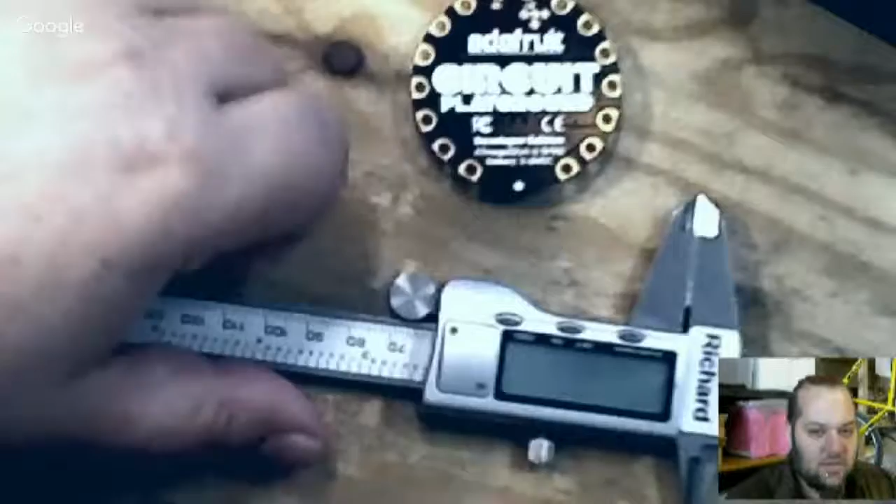So let me put that aside here. Essentially, I was going to show you guys how I can use my calipers and do all the measurements with the 3D program to get that all set up. But thankfully, Noah over at Adafruit was good enough to let me take a look at his 3D model that he's been putting together for Circuit Playground.

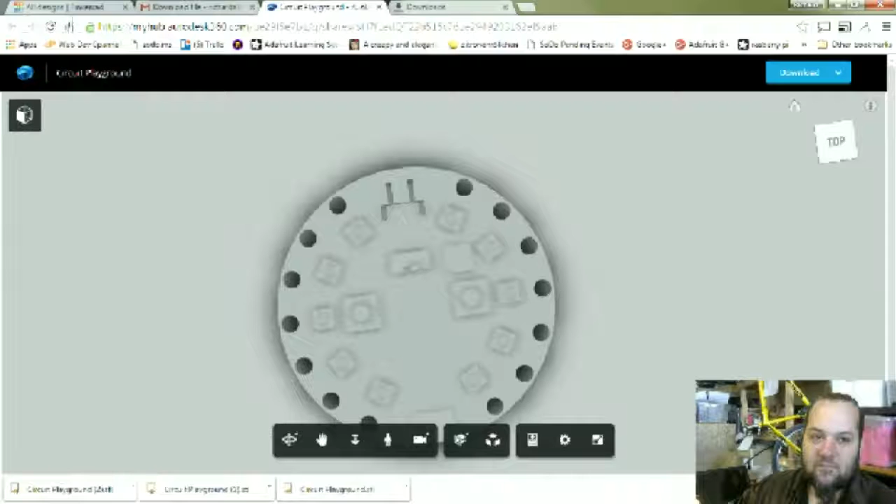So what I'm going to do is, this has got all the measurements that I need off of it. I'm just going to take this, import it into Tinkercad, and show you how I can make a basic holder for the Circuit Playground for the Pokemon Go badge. This will include a place for the battery to hold it. I have this idea about trying to make it so that the battery actually holds the Circuit Playground into the enclosure, and we'll kind of see how that goes.

So I'm just going to switch over here to Tinkercad, and I'm actually going to move my camera so we can see while I'm going through Tinkercad here.

So for those of you who are unfamiliar with Tinkercad, basically what this is, it's a free program by Autodesk. It's an online program, and I've been using this to teach kids about 3D printing. It's really great because it's very easy. You can basically just stack a bunch of shapes together. You don't have to deal with the types of facing issues that I've had with doing 3D modeling in programs like SketchUp for 3D output.

Yeah, I mean, we can put this enclosure together super quick, especially since we have a 3D model of the device itself. That would have been the most time-consuming part. So I'm going to go over here to import. I'm going to choose a file, and I'm going to upload that STL file.

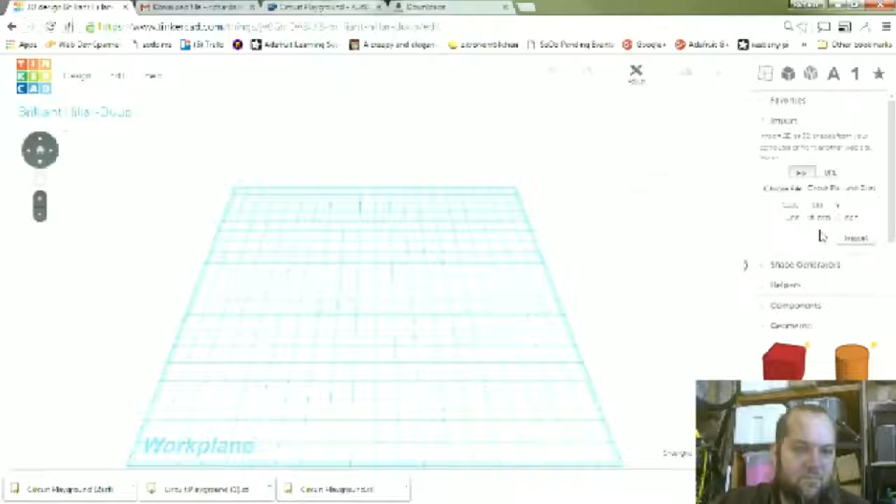Don't know if it's in inches or millimeters, but I'm going to go ahead and import it in millimeters and see how that is. That looks pretty right. So that should be 50 millimeters. Let me just confirm with the Circuit Playground. I seem to remember it was like 40 millimeters. Actually, no, 50 looks right. No, that was another device I was doing.

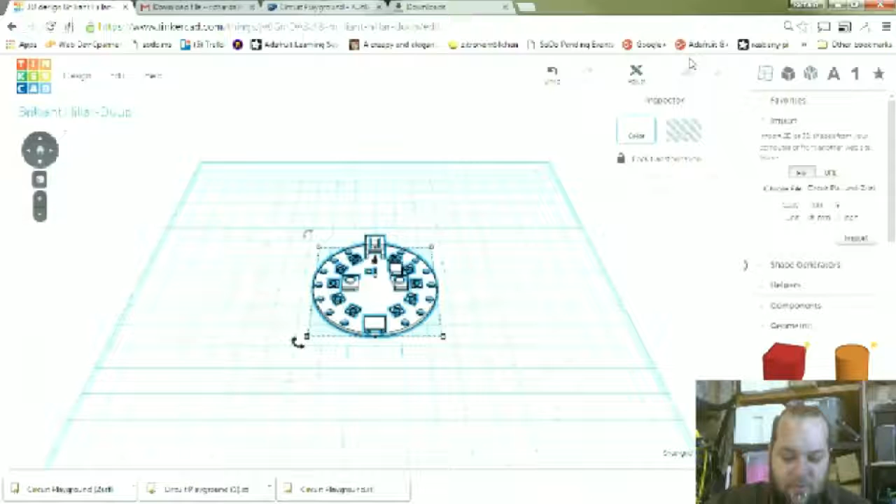I've been doing a lot of this type of thing, using my calipers to measure devices, and do a couple of components for Eagle, as well as some enclosures for this stuff. All right, so yeah, 50.82 millimeters, and this is 50.78 millimeters. So yeah, that's pretty darn close.

We do want to probably give it a little bit more room because the 3D printing does usually add a little bit to that inner diameter of something. So if we want this to fit inside of our enclosure, we're probably going to want to go out to, let's see, yeah, I might just push it out to like 51, just to be safe, for the outer diameter of that.

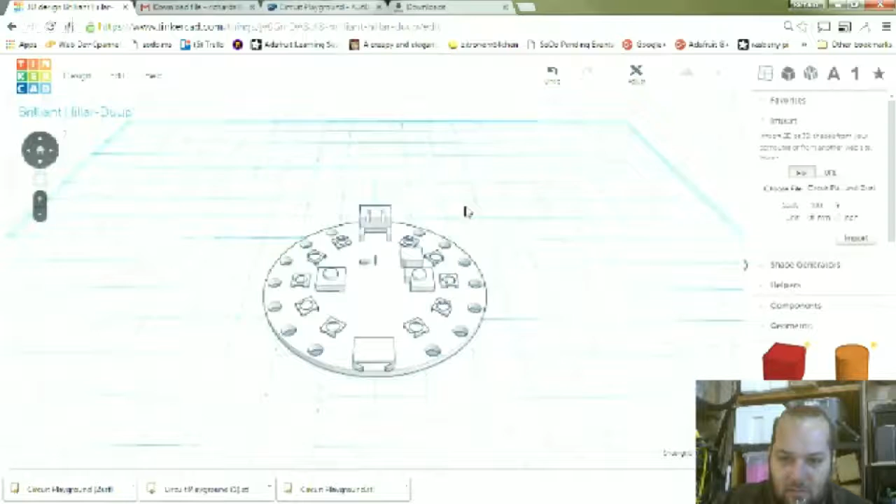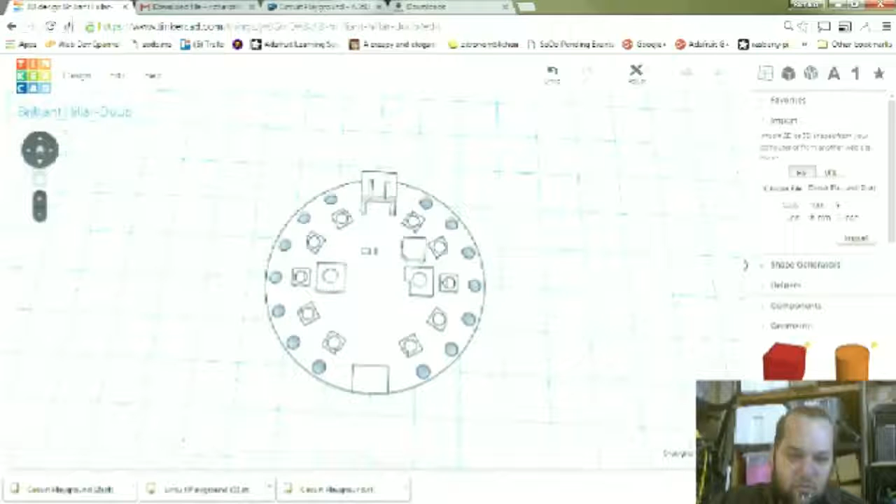But let's go ahead and, it looks like we do have a little bit of glitching in the import with some of those faces, but that's okay. This gives me the general idea of what the positioning looks like, and specifically like the height of all these components. So what I'm going to do is I'm going to start with a cylinder, and I'm actually going to make this a clear cylinder just so I can see. So I'm going to make that a hole first.

I'm going to reduce the height of this, and this is basically going to be the outer shell of our piece. I want this outer shell to just cover the top of that battery container, or the battery holder.

Shift to increase this.

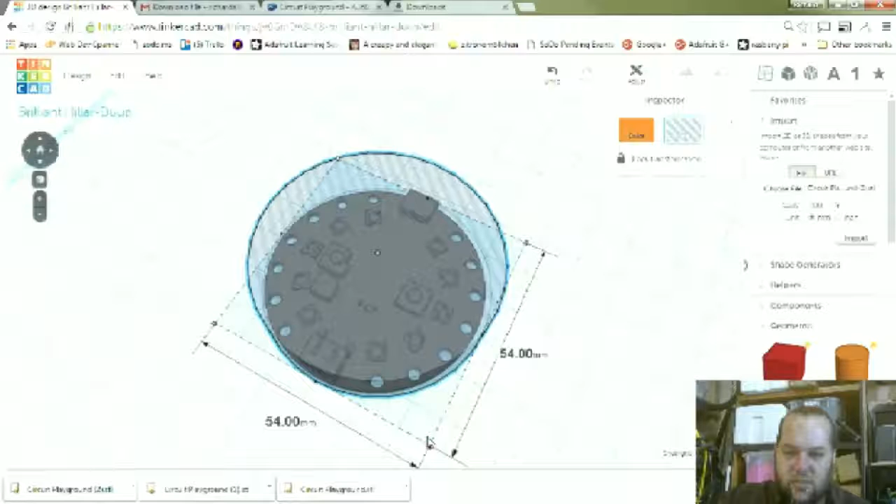The one gripe I guess about Tinkercad is that it doesn't allow you to just go in and enter numbers for creating shapes. You pretty much have to just look at the numbers that are on there. But all in all, it's pretty good.

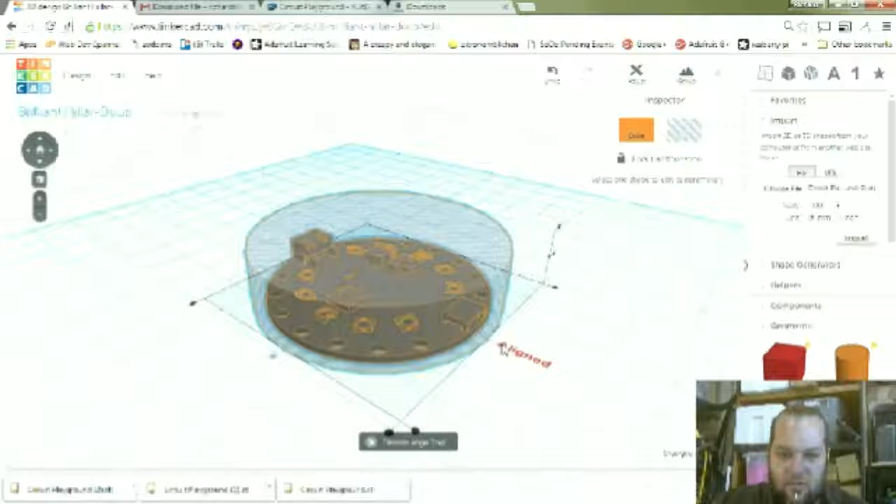So I'm going to align this stuff so that everything is centered. All right, that looks pretty good.

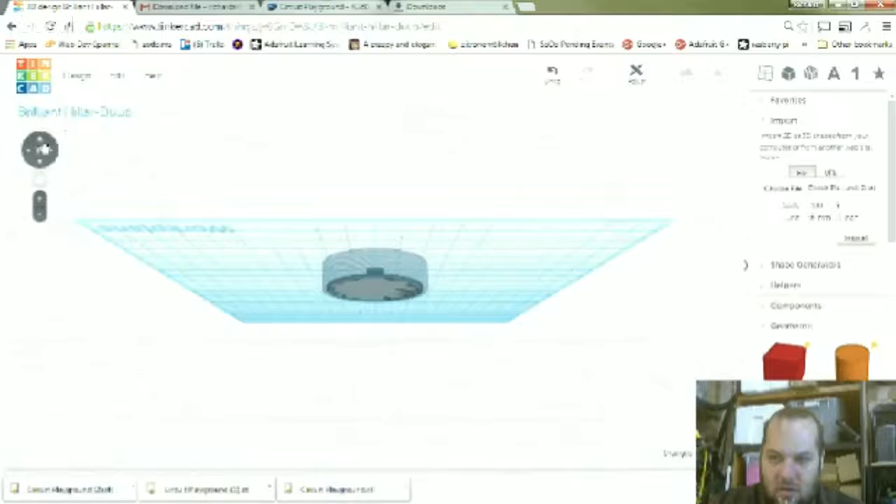And then I'm going to come here and look at the side of this, and just make sure that my enclosure is going to come just up above that. So let's see, 8 millimeter.

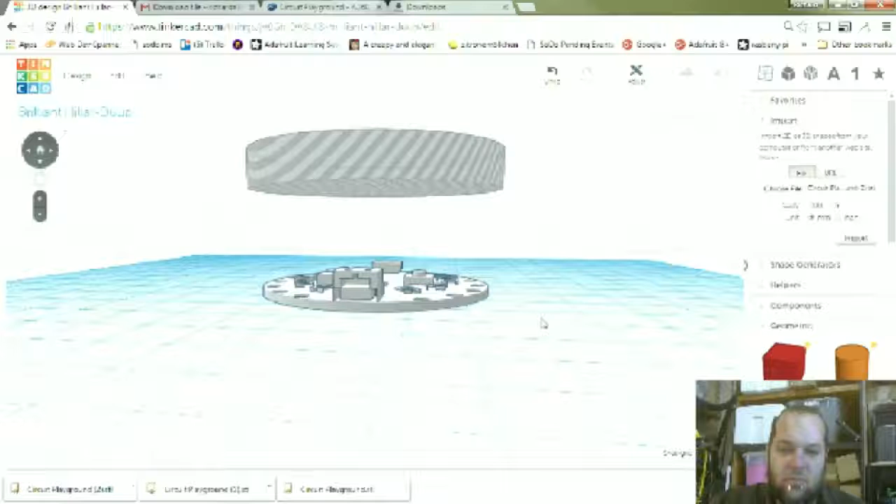Let's go ahead and lift that up. And let's see what the overall height is, because it's the highest component. So yeah, 7, so that gives us about 0.9 millimeter, which I think should be enough for that.

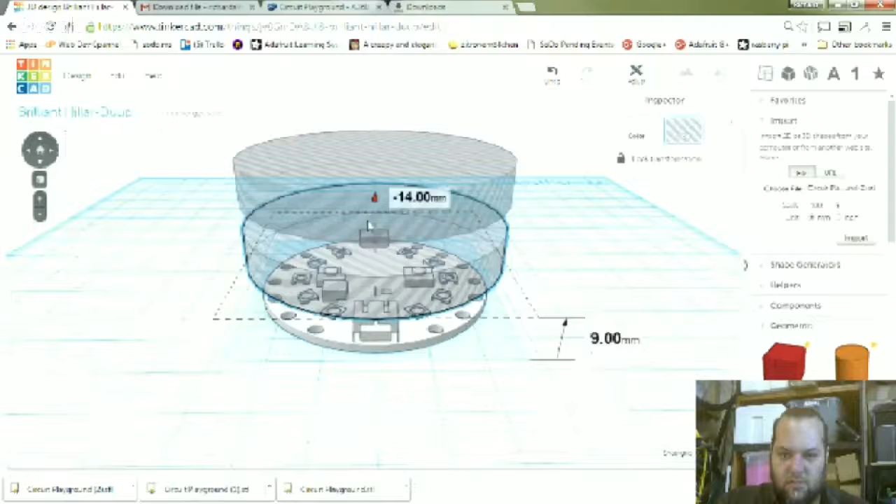So we have our outer shell. That's cool. I'm going to duplicate this, and then what I want to do, this one is going to represent our inner shell.

First of all, I'm going to reduce the diameter of this to 51 millimeters.

And then I also want to make the height 7.1 millimeter. Actually, I might just go 7.25 millimeter. So that's a 7.25.

Actually, you know what, I am going to go down a little more, and I'm going to do it 7.2.

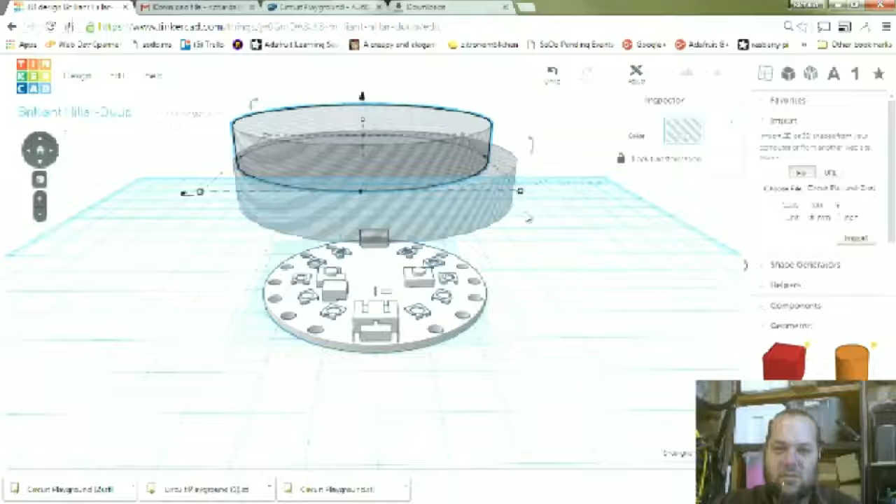Yeah, this is my one complaint about Tinkercad. It's really hard to get like a precise number if you want those small numbers. So that's 0.1 millimeter over that battery enclosure there.

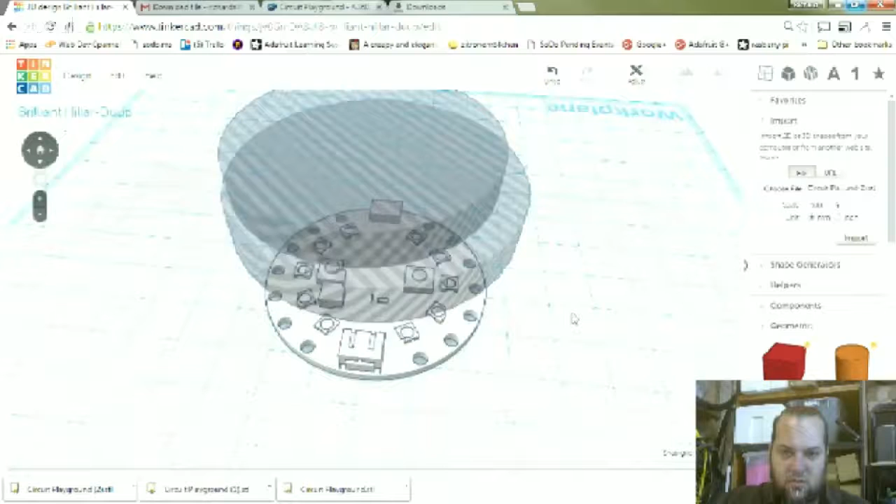There's a couple of windows here, and so this is basically our inner void that we're going to have. So now I'm just going to center all of those here to align and center those. And then I'm also going to align the bottom of those.

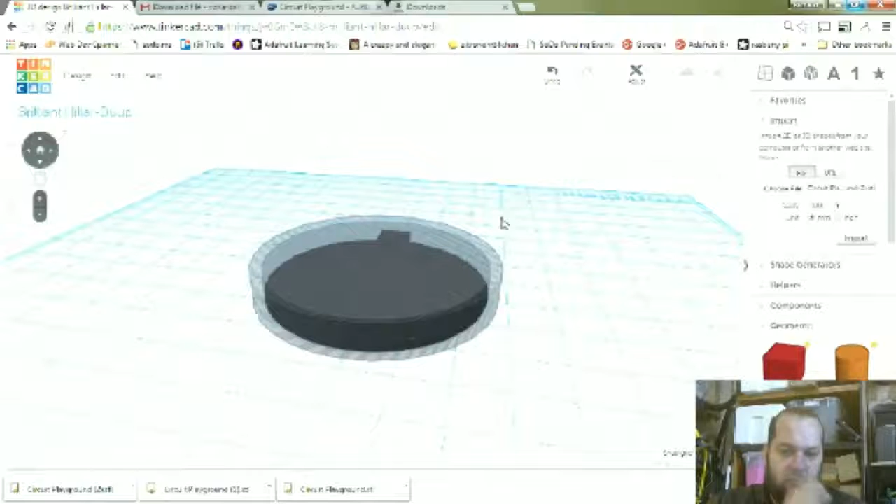All right, so now I have these set as holes just so they're kind of transparent. But as you can see, I pretty much have like a disc that will have side walls and top walls. And that's the basic shape of what we want.

So I'm going to change this outer one to a color. We're going to do orange just because it's nice and easy to see. Go down here, we can see the inner shell and that outer shell.

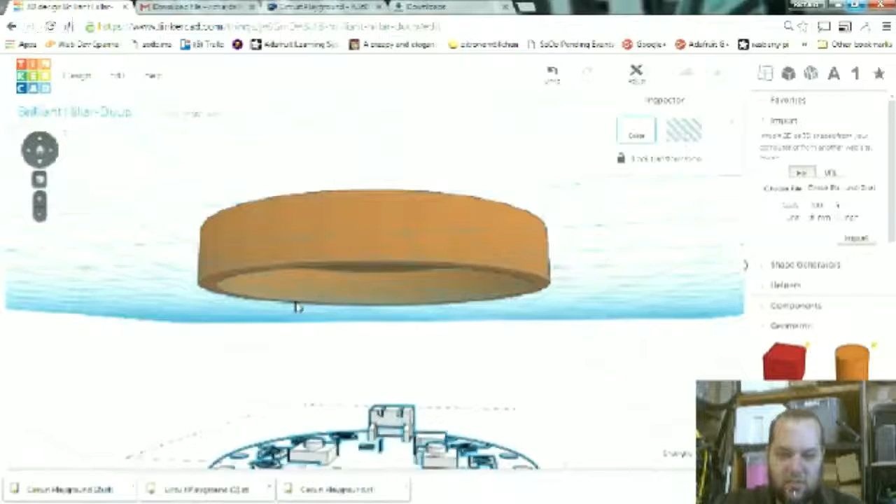And I'm going to group those so that it punches that inner shell out of the outer shell. And if I drop this down, you can see I now have a nice little shell that this circuit playground should fit perfectly inside of.

But I don't necessarily want to stop with that. So I'm going to switch this back over to the easier snapping method. I'm going to turn this back into a hole so I can see through it again.

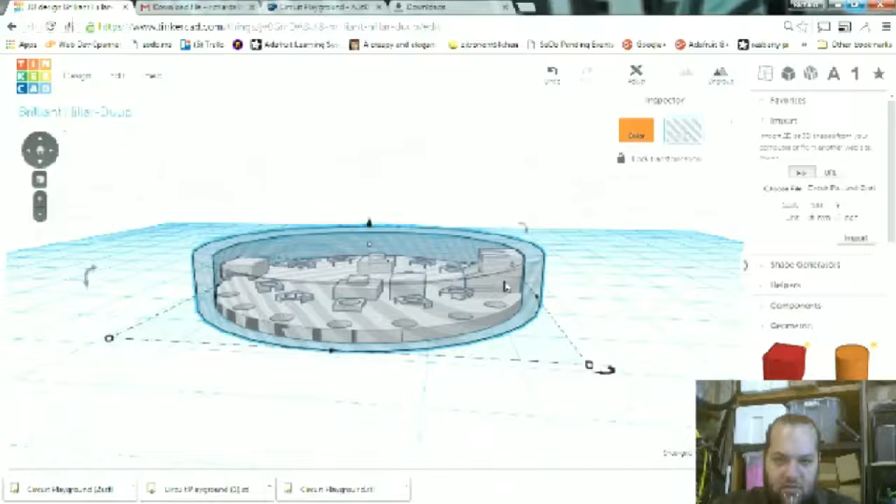And now what I want to do, so basically this is my highest point here. So I do want to have that flat up there, but as you can see, that wall is pretty thin. And I do want this kind of durable. This is going to be something people are going to run around.

But if I put it to the side, you can see that really it's just this component right here, the battery holder, or the battery connector, that is the tallest component in there. And it doesn't go very far. And then there's all of this space here where basically it looks like the buzzer is pretty much the second tallest component in there, and it's right about in line with the buttons. So I can basically bring this down pretty much right over there.

I probably won't. I'll probably make it so that it does have a little bit of room just because I want the LEDs to, this will also act as a diffuser for the LEDs. So I do want that to kind of shine through.

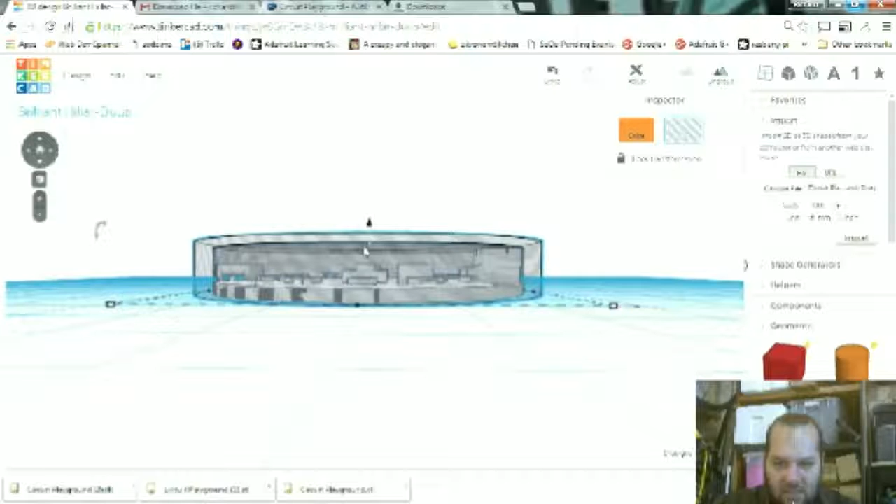But I need some of the top to get down close enough to those buttons so that I can make an indentation in the top that allows you to press those buttons pretty easily from that flat surface. I kind of have some ideas of how to do that. We'll test them out and see.

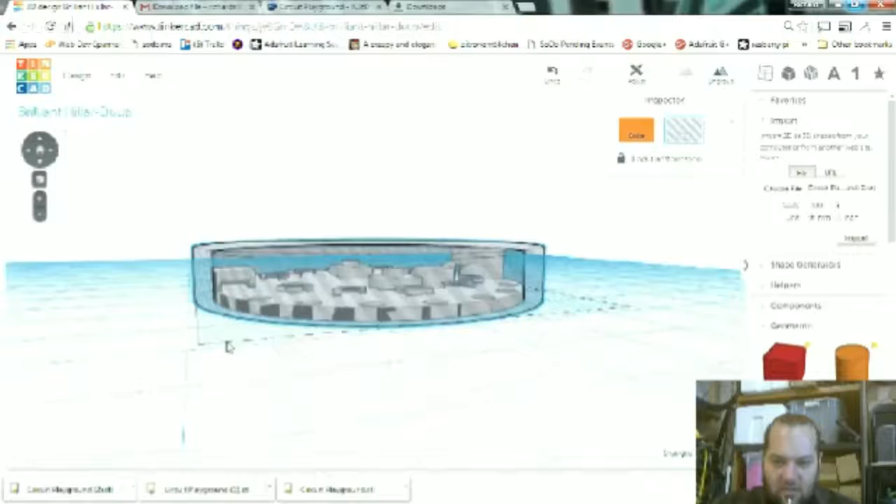And then of course we need to do an opening for the USB. Or actually, I may not do an opening for the USB, just basically have it so that it accommodates, but it looks like it does kind of extend a little bit outside of the circle, so I might need to modify this part right here.

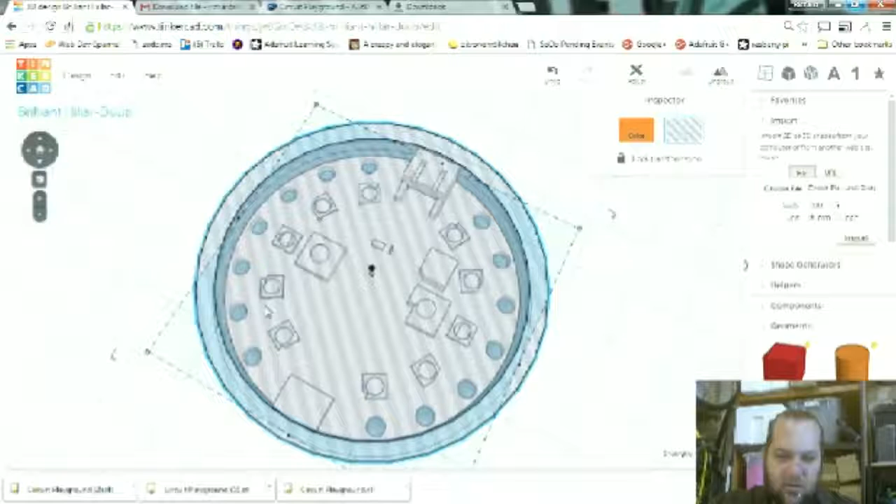One thing we definitely need to do is make an opening for the battery connector. So that's going to have to go outside. But I want this to look like as much like kind of a hockey puck type design, just a nondescript white disk as we can, so that it doesn't really stand out as being a piece of tech until the lights are turned on in there.

So let's go ahead and we're going to add another piece to this disk. So I'm going to go in and edit this component.

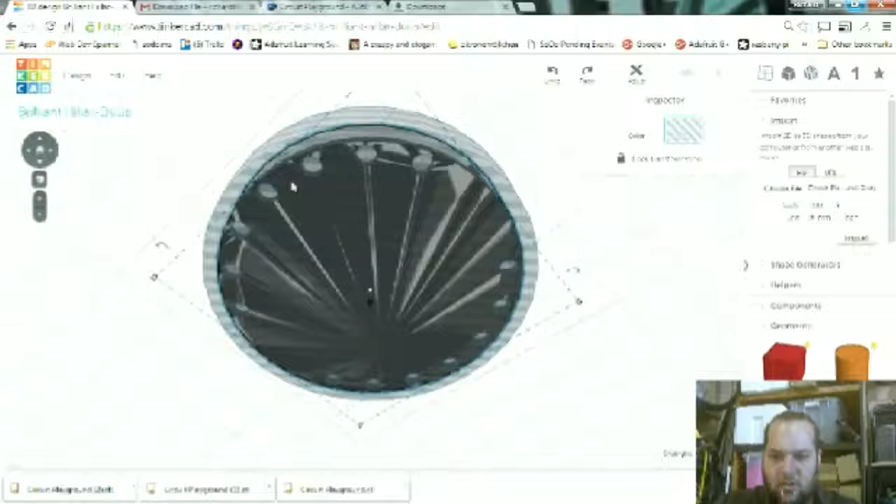Okay, all right, so all right, I'm going to select this. I'm going to duplicate this internal structure. And what I did was I basically just went into this grouping.

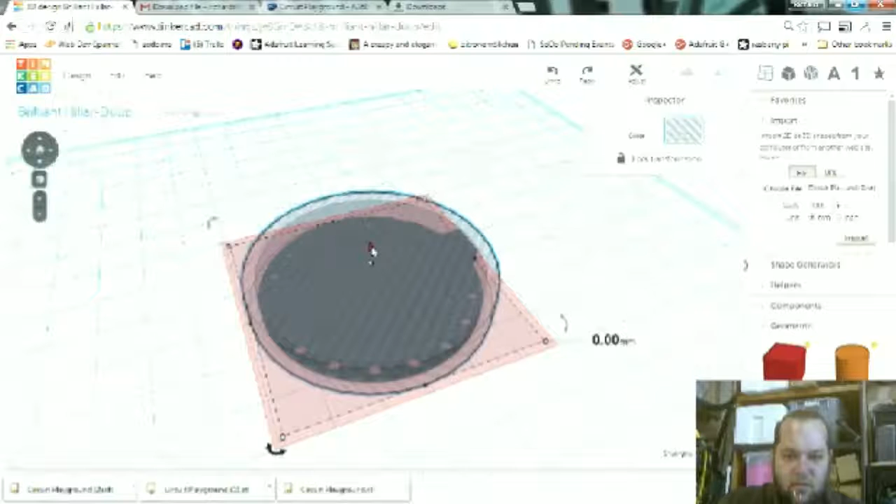Yeah, I'm going to go into this grouping to edit the holes and the solids. So I'm going to duplicate. Let's see how I want to do this. So actually, what might be the easiest way to do this is going to be to actually just reduce this disk all the way down.

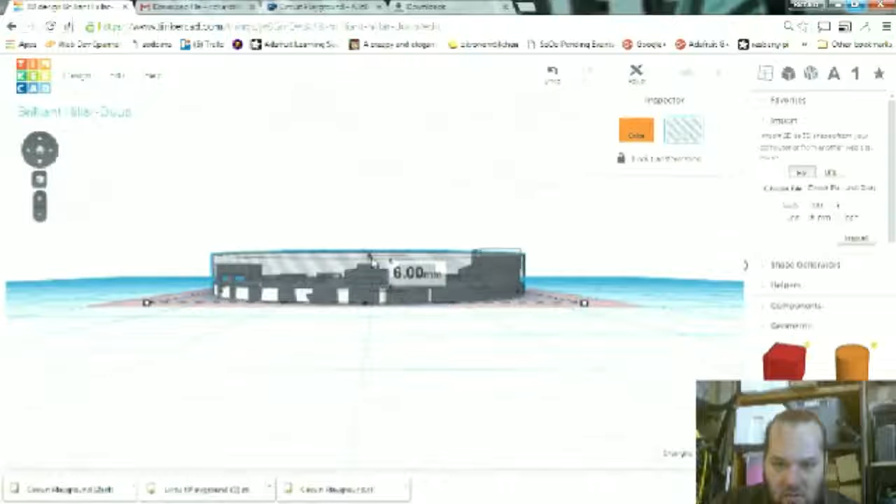So I'm going to go to 6. That's going to leave me with, I think that should be enough to make this pretty secure. And it doesn't leave a huge amount of room over the button. So that looks pretty good for our circular hole.

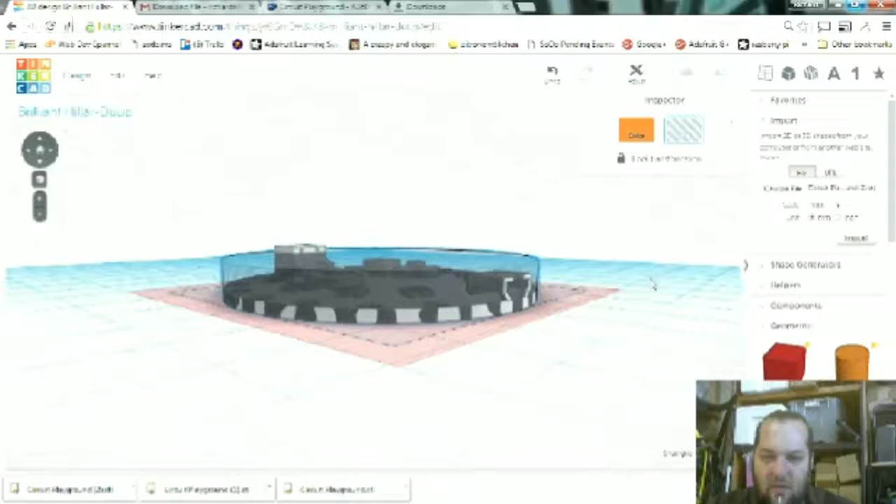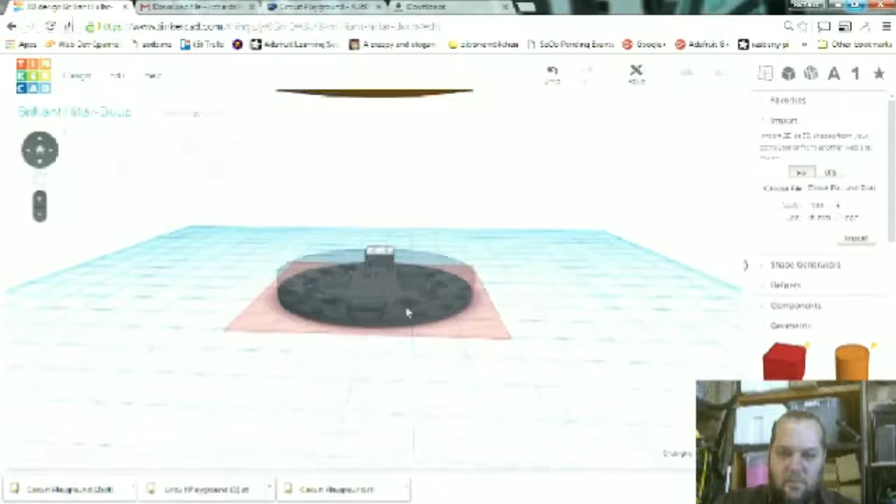Alright, and actually, I'm going to re-center all of this stuff. Alright, so I'm going to go back into my grouping. So that's going to be the new shell.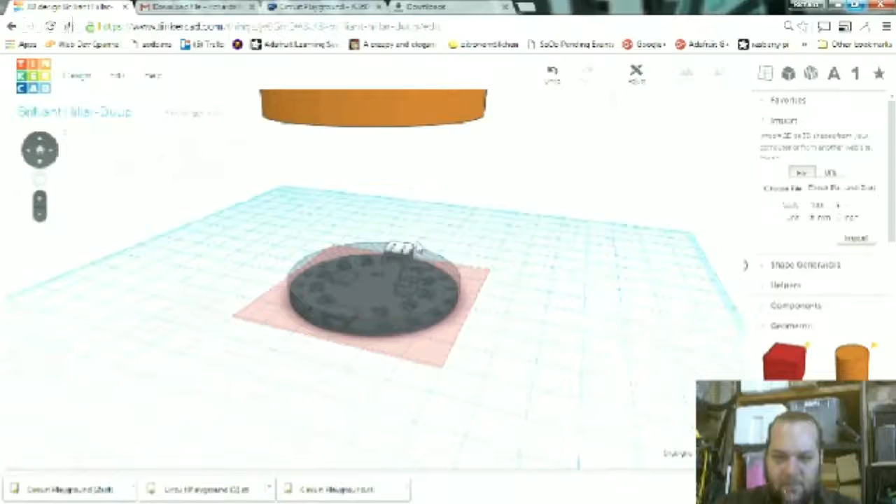Now I'm going to go in and basically just create a box over that connector. That is going to be an additional hole to give me a bit of room.

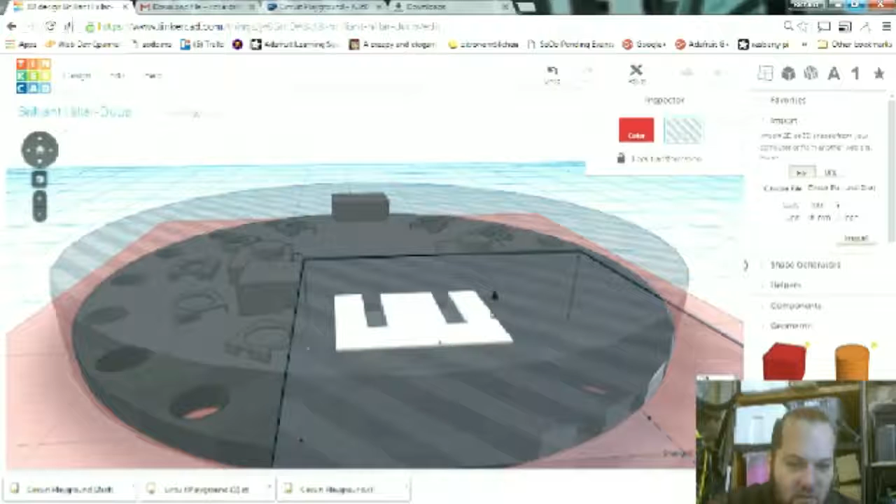And I'm going to make that, so if I remember right, that was going to be 7.2 millimeters. So I'm going to go down, switch that to 0.1 millimeter increments, 1 and 2. Yeah, I'll just go 3. That's pretty good, I'll give myself quite a bit of leeway here.

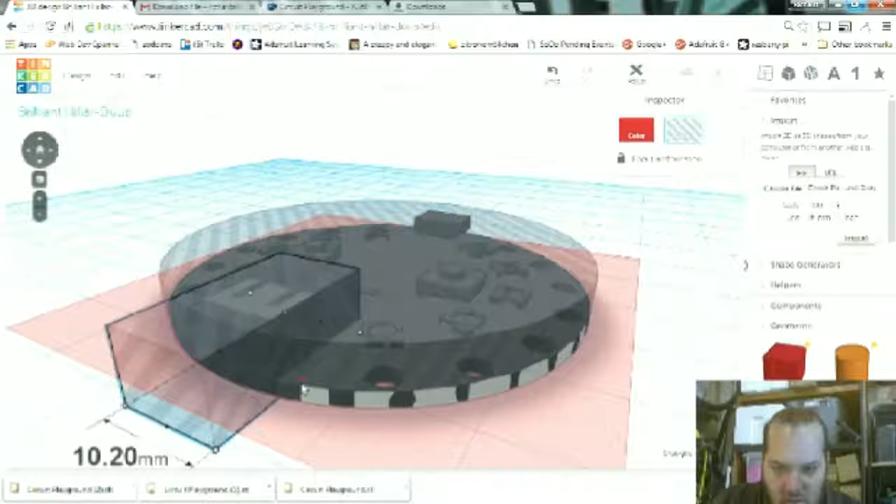And then I'm going to reduce this down so it pretty much comes right up next to the sides of that piece. I do have a couple of smaller components that are around it, but they're pretty low, so I don't think I have to really worry about the sides there. Let's see.

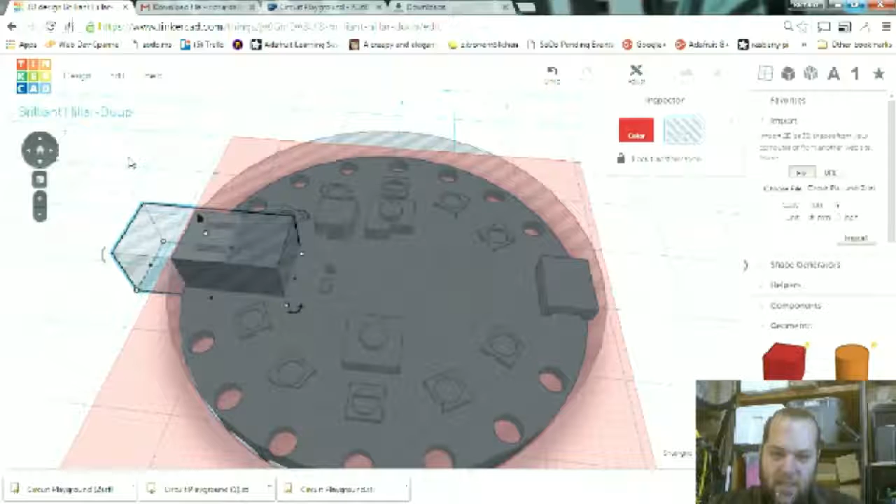All right, so that's pretty good. I do want that block to extend out because I am going to be punching that out of the side wall as well. All right, so I think that does it for our basic shell.

So now I'm going to select these two. I'm going to align them so that they're all on the base. All right, so now I have the inner shell.

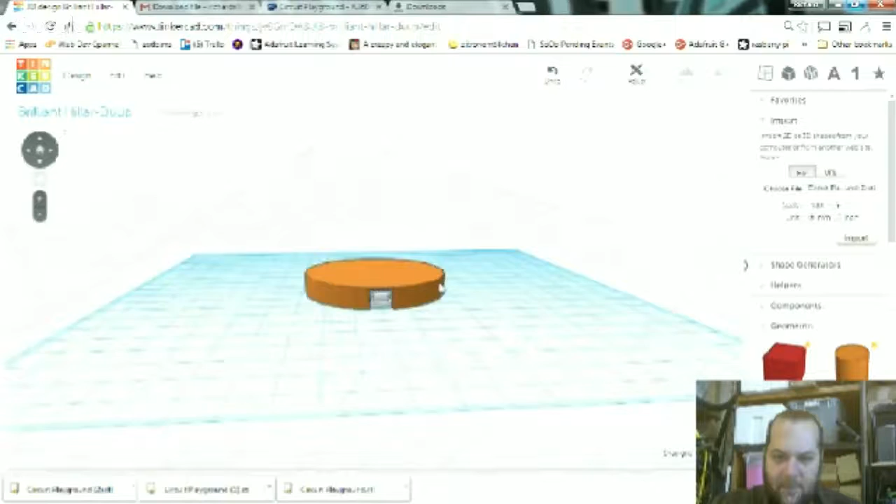I'm going to punch that battery part out by grouping them. And now, yeah, as you can see, I got a nice little battery hole that comes out there, and you can kind of see. I'm going to actually make this a hole so you can see inside. So you can see inside that I've got quite a bit of room.

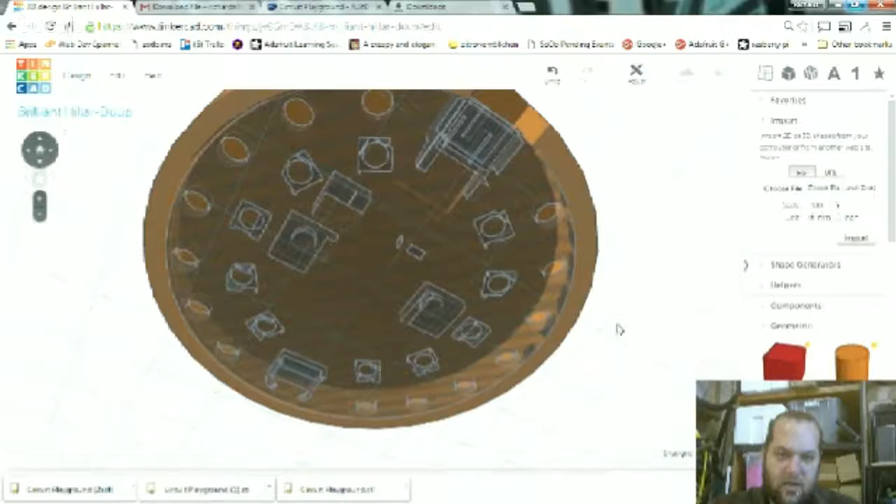Actually, I do want to get rid of that little pocket there because I don't really need it.

So I'm going to just bring this in enough to where it hits the back of that battery container, because I will be having light coming through this. It is acting as a diffuser, and the thinner the material, the brighter that spot is going to be lit up by the LEDs. So I do want to have it pretty consistent going through here.

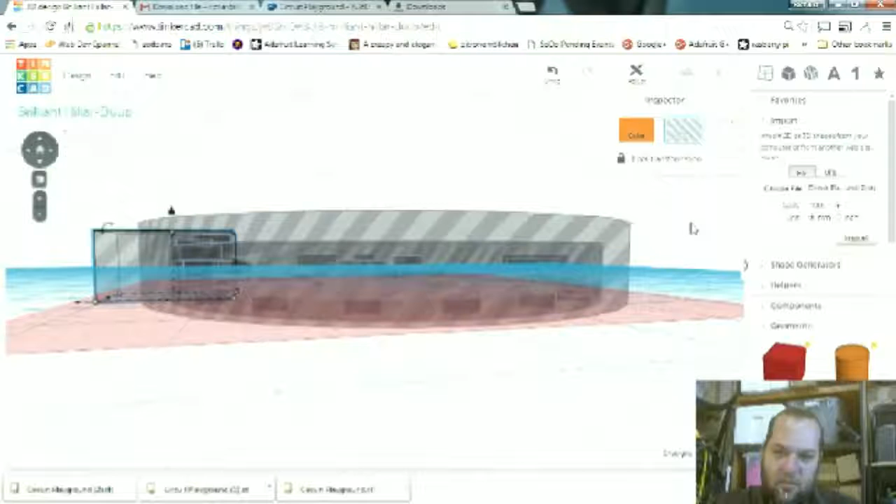Let's switch that back to a solid. And there we go. So now I pretty much have this set up so that little pocket in there just clears that battery connector.

All right, so that's a basic design. If I wanted just to have no interaction, that would probably work with it. But I do want to have some interaction and be able to connect to those buttons.

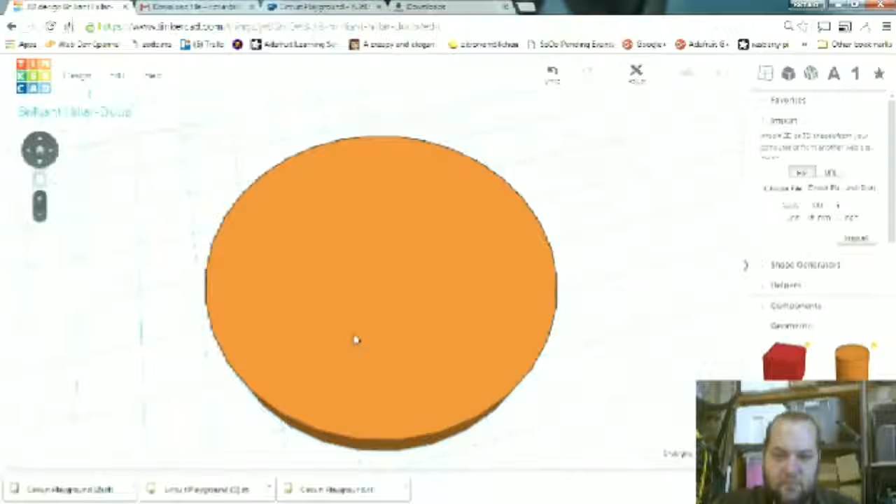So I'm going to set this as a hole for now so that I can get some circles right over that button. I want to make sure that whatever circles I'm going to have as a push button are not going to get too close to that speaker there. I had that problem before with the design.

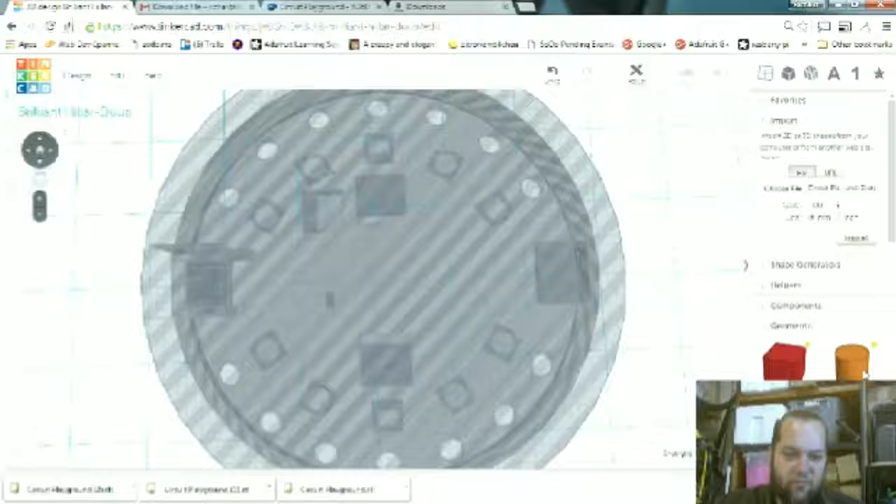And I wasn't able to actually push the button in there. So let's...

Hey, Tony, I got a quick question for you.

Tony? So on the 3D printer, what's the thinnest shell that you would say I could probably print on there? One surface, one wall, light setting - what would the thickness of that be? Are we talking 0.1 millimeter? 0.4? Just lay it down with a layer. Okay, so everything should be bigger at least than 0.4. Then I'm probably pretty good at where I'm at now.

You want to test it out? I've loaded up the filament. Yeah, we can test it out.

I'm trying to see if I can do buttons so that there's like nothing, like it just looks like a flat surface, and if you press in a certain area, it'll basically flex the center of the badge, and then have a knob basically on the inside that extends down.

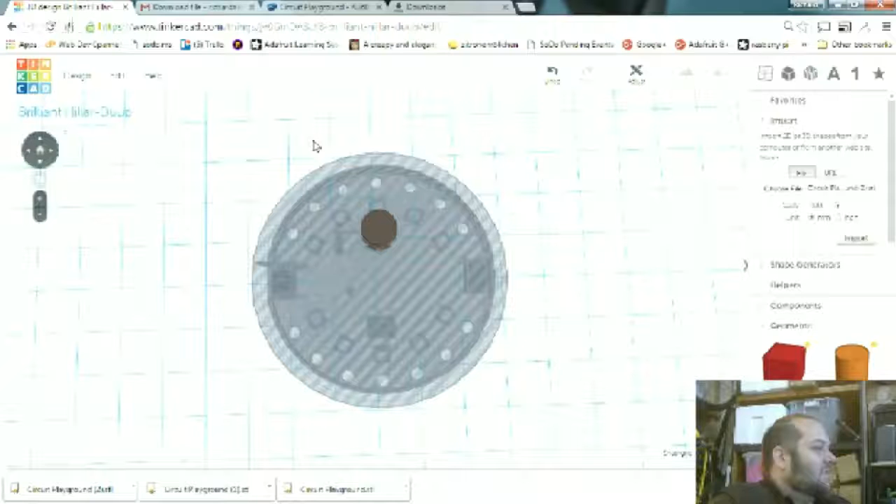I mean, we're talking like a flex of maybe a point, or maybe 1 millimeter. Yeah, so if we get like a 1 millimeter flex, we could try it out.

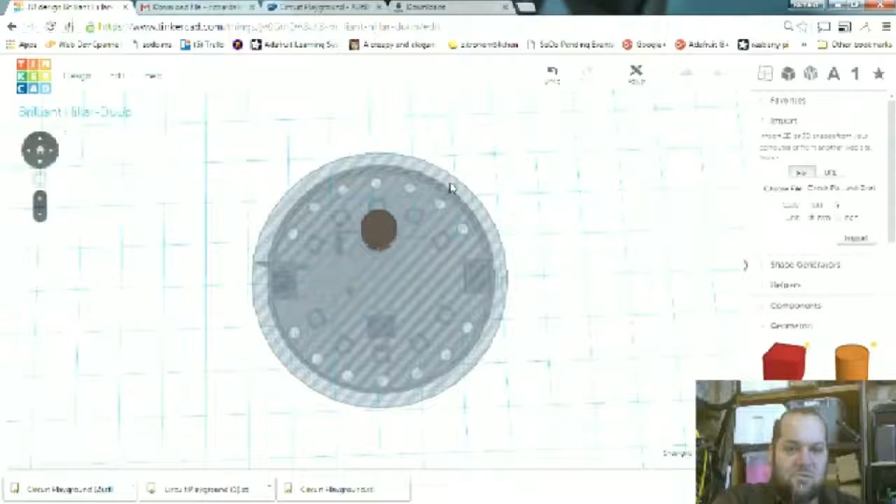Okay, you got a camera mount for that tripod? Can mount a phone camera. So Eric can mount his camera on that. We've got one, but I don't have it. We've got one that was - well, they were using it for 3D printing and a bunch of other stuff for filming it. But I thought Eric had used it last. Okay, so we're gonna try and...

Sorry, I had to consult with our 3D printer expert here for a second.

So yeah, what I'd like to do is make it so basically this surface is totally flat. Like you could look at that surface and you'd never know, you'd never be able to see a button. But I do want to be able to push these buttons.

So if I press on this side, then it's going to push that button. If I press on this side, it's going to push that button. But also have it so you do have to push it fairly hard, because especially with this application, you're going to push it to change the color of whatever Pokemon team you're on, and you don't really change your Pokemon team that often.

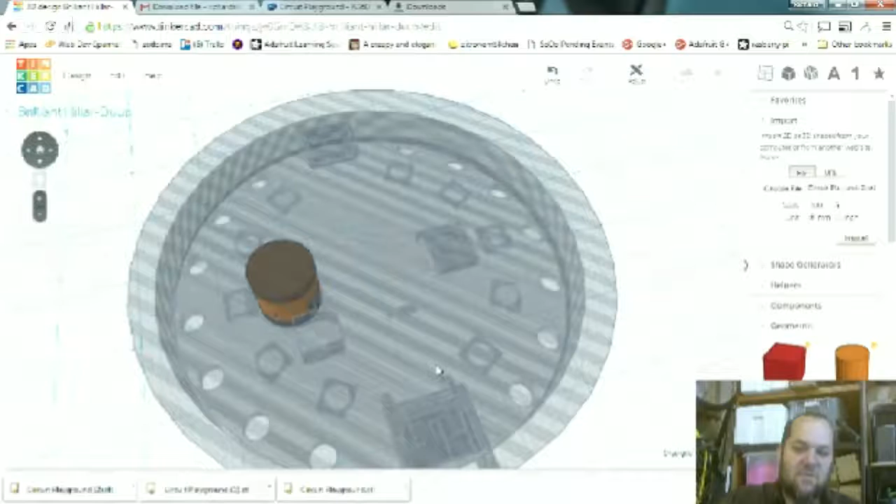So I do want to make it kind of difficult for that to be pressed, and then I might as well do a button on this side as well, just for future projects. This isn't just going to be for Pokemon - hopefully we can find a use for this case in other circumstances as well.

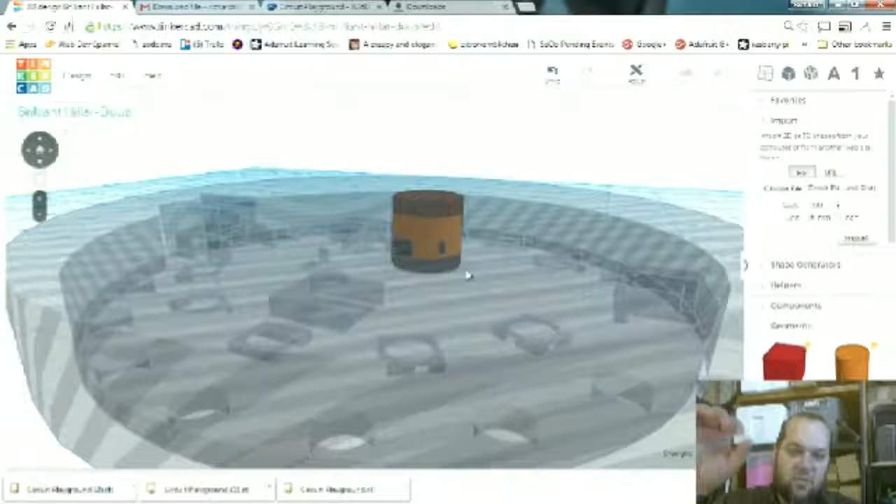So my plan is basically just have this top layer thin enough so that we can get a good flex out of it, and then just have a piece that's 3D printed that comes down from the roof here and rests just on top of that button, so it doesn't take that much to press, because it doesn't really take a lot to register a click on these buttons. And of course, the beauty of 3D printing is that we can try this out, and if it doesn't work, we can make a tweak and see if we can get something else that's going to work.

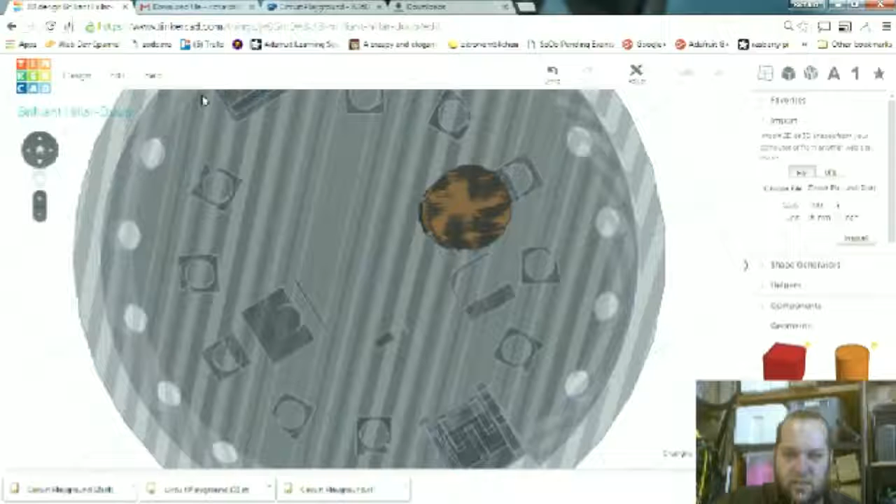So let's see if I can get to - there we go. All right, so I'm trying to get to that button. We're going to raise it up.

Yeah, so we can see there's a teeny tiny little gap there between where the button is and where our knob is, and that knob is not really going to come too close to our buzzer there. I'm going to try and put it about in the center.

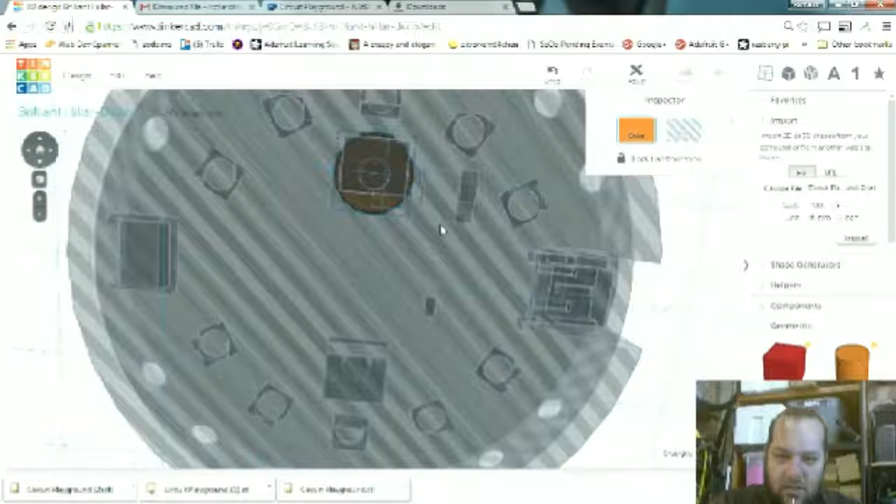Tinkercad, in some ways, is a pretty good program. You can get a certain amount of precision, but not a huge amount. So I'm just going to kind of take a bit of a guess at some of this stuff.

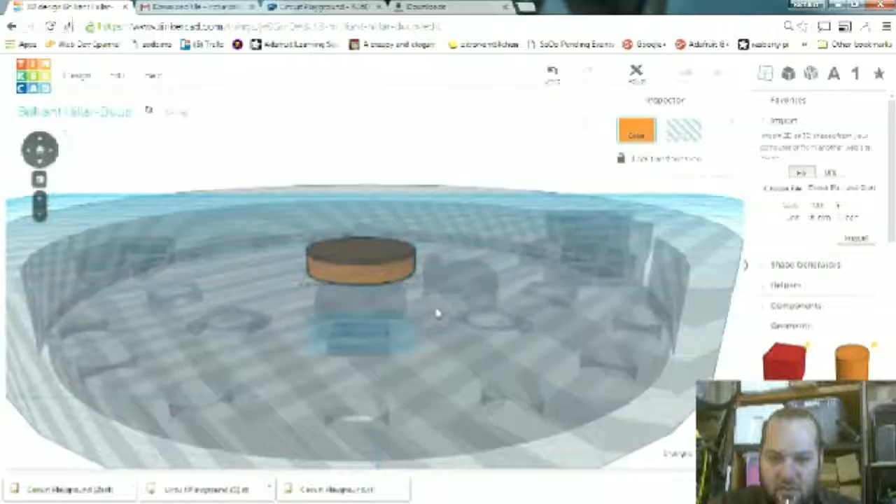I'm going to extend this up so that it just intersects with the roof of that. And now I've got like a little inner button on that button. I'm maybe going to decrease the diameter of that, because we don't need it that big. We just need it to be able to press that button. That should be more than enough.

I'm going to again extend it so that it touches in here. This is what I love about Tinkercad, is that all I have to do is just intersect these shapes and it will fuse them all together.

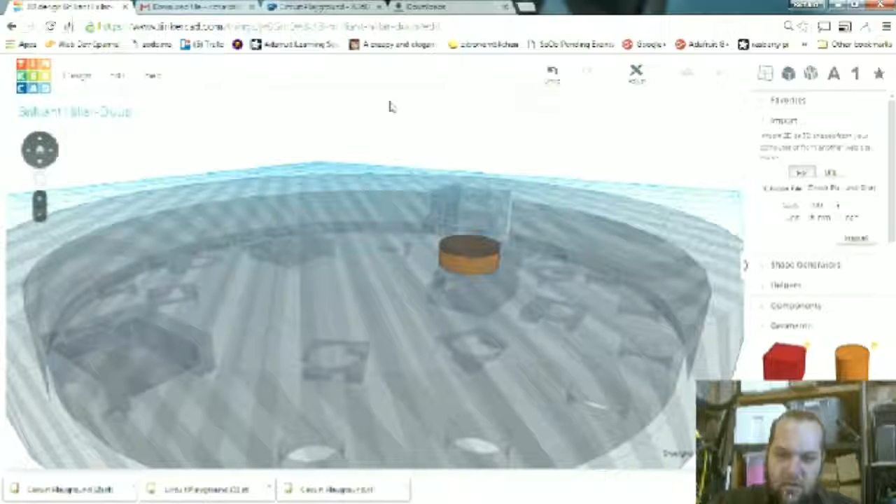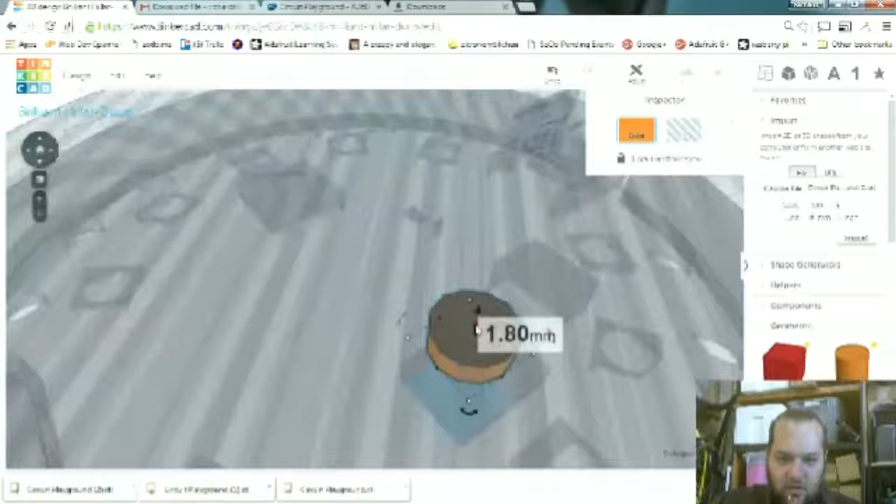All right, there— oh shoot! Now I have to try and select that piece. There we go. And actually, just to make it easier to move this stuff around, I'm going to extend it so it's easier to select that one piece.

All right, so I'm going to edit, duplicate, and then I'm going to move it straight across to the other button. And there we go. So I have my two button covers.

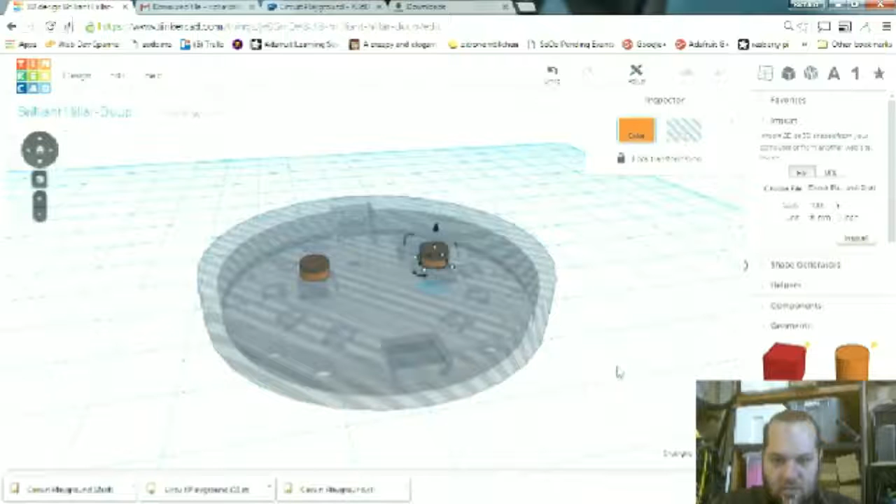I'm going to extend that down below the surface. And actually, that's pretty much it. I think that is going to work.

So let me change this back to a solid. And then what I'm going to do is pull that down so we can take a look. So this is basically what the inner structure looks like—really simple, with those two little extensions that will hopefully let us push the button, and our accommodation for the battery connector in there.

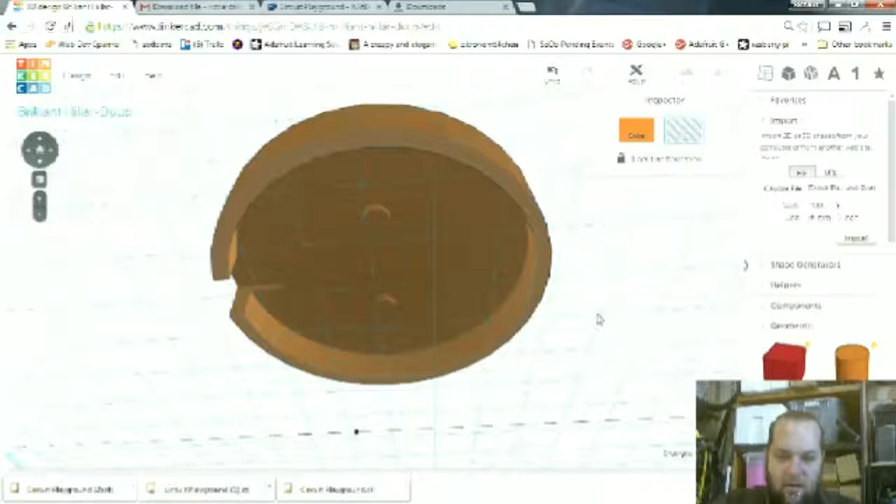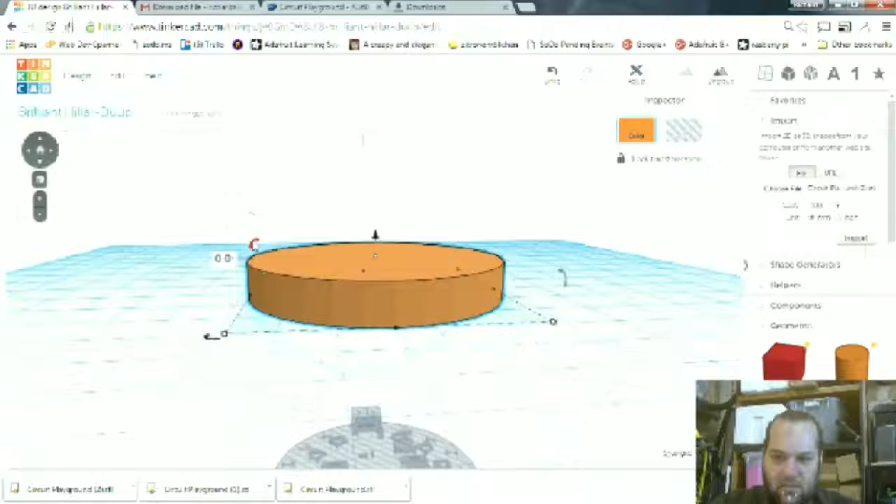Now there is one other thing that I want to do. Well, first of all, in order to make sure this thing is going to print, because that's a pretty wicked overhang in there, I'm going to group all these components together, and then I'm going to flip this 180 degrees, so I'll print it on its back. That is going to result in a much better print.

And one other thing that I kind of wanted to do was—so basically this ledge represents the bottom of the Circuit Playground. Kind of had this idea, and I might just actually duplicate this piece, so in case it doesn't work out, we don't have to do too much.

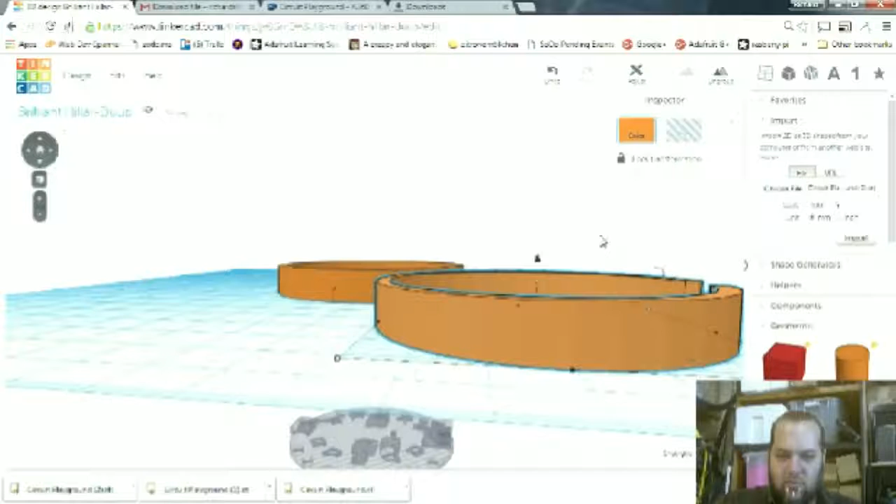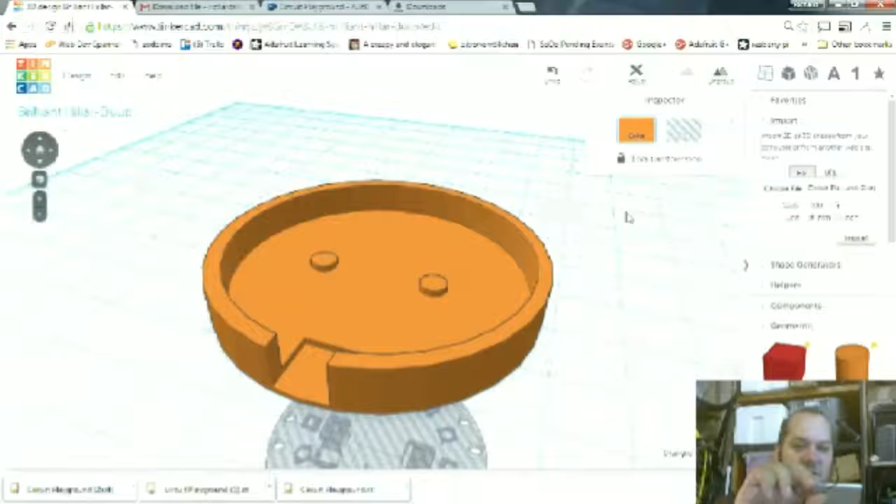Save it. Put this off to the side here. And what I want to do is take my battery—I'm going to use this battery right here. This is a 1200 milliamp hour battery. It's pretty thin, not too big.

And I'm going to measure the thickness of this. So the thickness of this battery is about 4.7 to, say, 4.75. Let's do 4.8. Let's see—yeah, I think 4.8. Maybe 4.9... 4.8. Still catches a little bit. You know, I'm going to go with 5. So 5 millimeters. That's what we're looking for.

So I'm going to go into this group. I'm just going to start grouping stuff.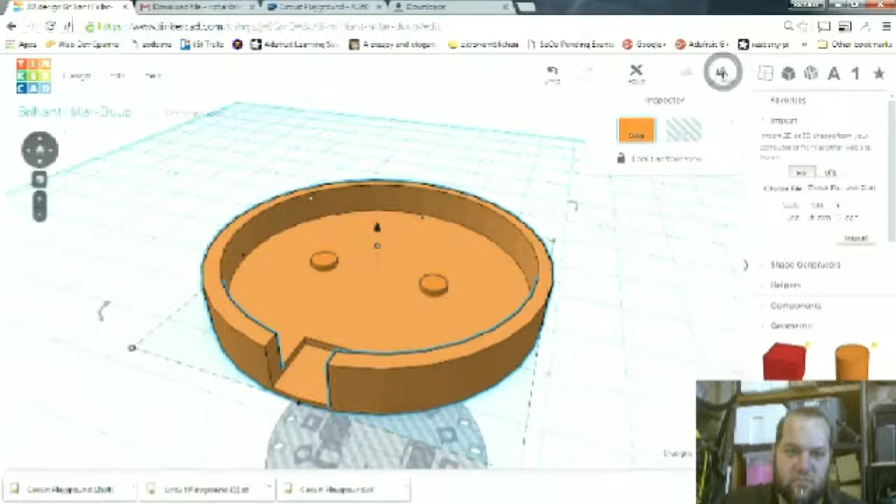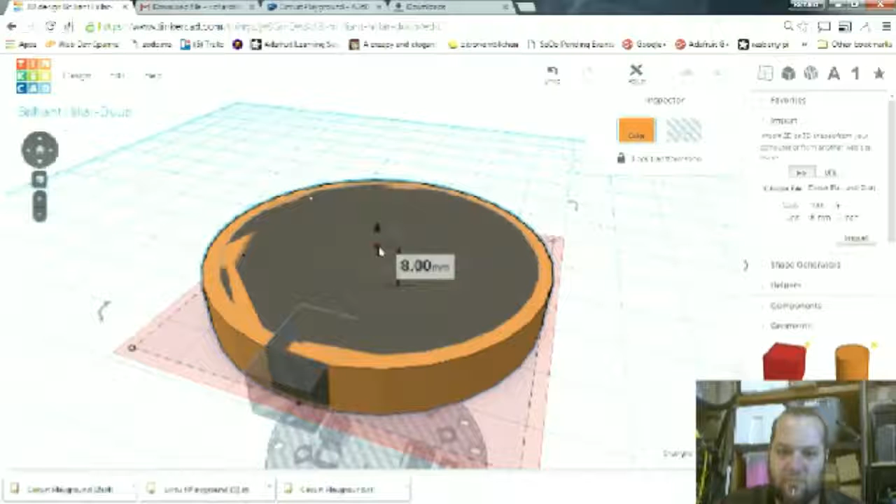And what I'm going to do is extend that outer ring to—let's see, 5 millimeters, and then I probably want to have at least 1 millimeter on top of it. So it's going to be 6. So that's going to be around 15 millimeters total that I want.

Alright, actually I'm going to switch to— okay, so we're at 15 millimeters. And— oh, you know what? Actually, we should have extended that other part first. Hold on, what happened?

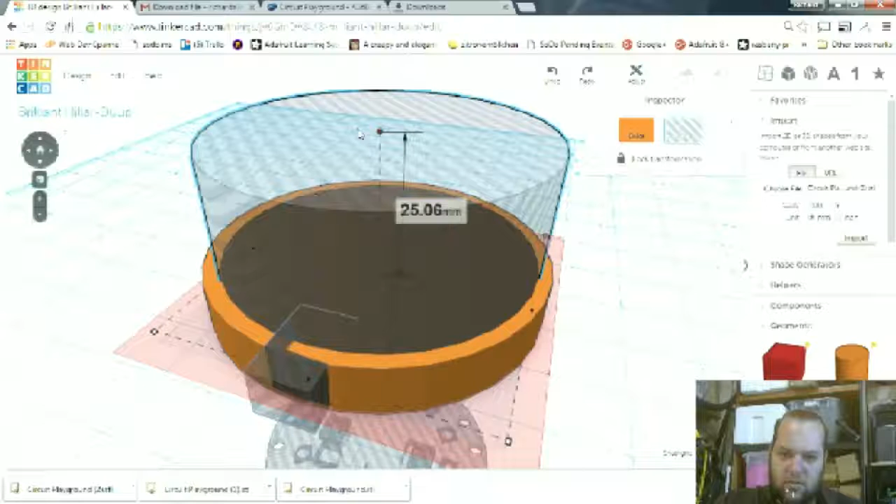Okay, let's extend this part out in this direction. And then this one is going to go out to 15 millimeters. This is still going to punch a hole all the way through, and we'll just go a little bit beyond. All right, so that is perfect.

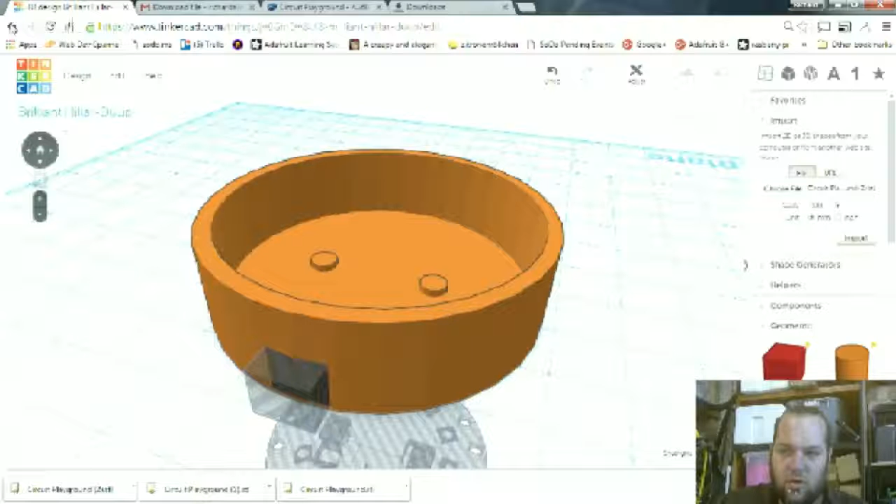Now what we want to do is we don't want that battery to be—and we don't want this whole thing to be like that. We do want the battery to basically slide in here, and then it will hold down the circuit playground. So we're going to create a block that's going to represent our battery. We want that block to be 5 millimeters.

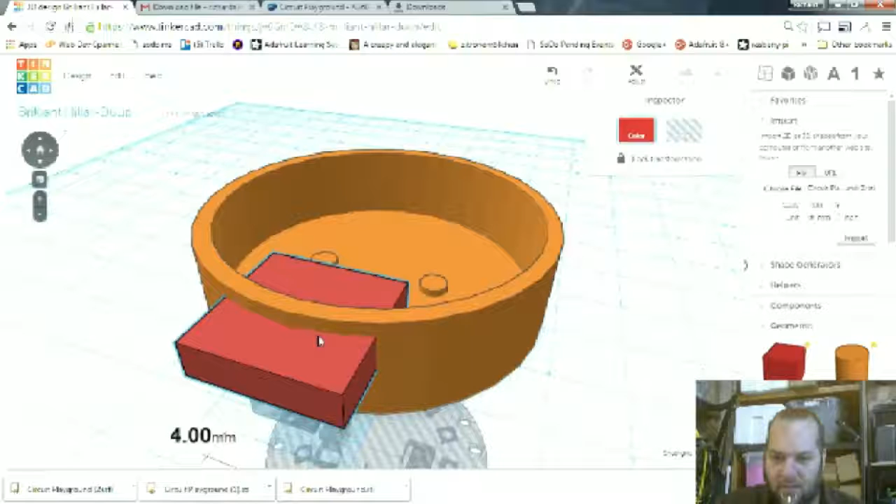And then we also want that block to be 8 millimeters from the top. Basically this is going to cut our slot. So if we can see, that pretty much comes right to the bottom of where the circuit playground is, and that looks like it's going to give us a perfect little slot to hold it in place.

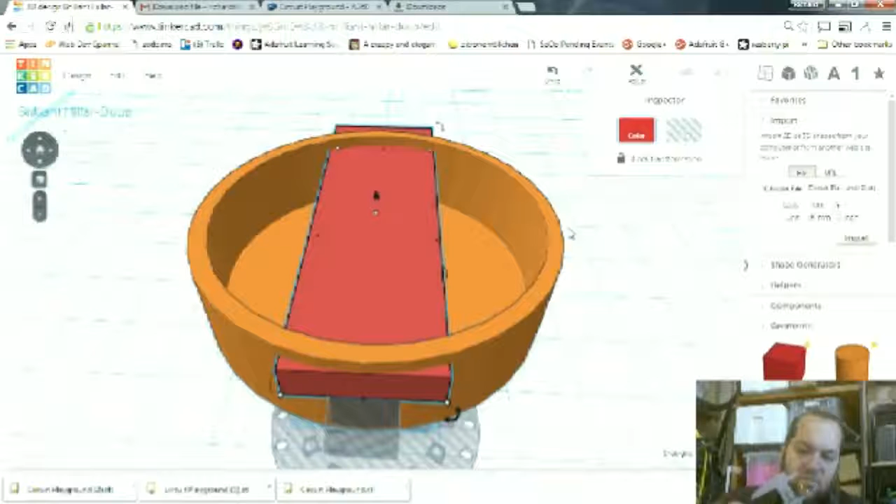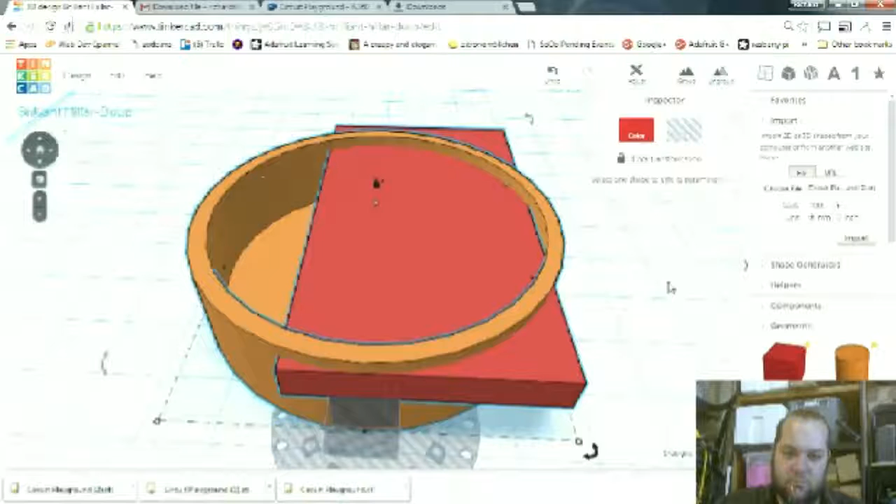I'm going to measure the width of the battery, looking at 34.49. So maybe, yeah, I'll do 35 millimeters for the width here. So bring that out to 35. And this is kind of how I assembled the other one, just with double stick tape and Velcro. So I know this is pretty much going to fit.

I'll set that as a hole. And what I'm going to do now, I want to start centering this stuff, but some of it is not set up to be centered. So I'm going to group together the main case. Okay, so that's set. And now I can center things, and they should center properly. So I'm going to go to adjust, align. I'm going to center everything in this direction, align everything in this direction. Now we have it all set.

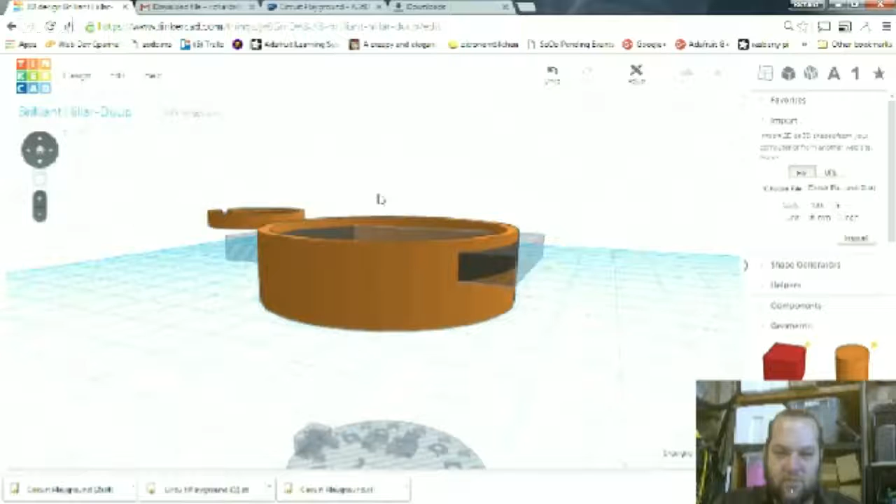Going to group these two sides. And there we go. There is our enclosure. So we're going to try and 3D print that and see how it does, how it holds up.

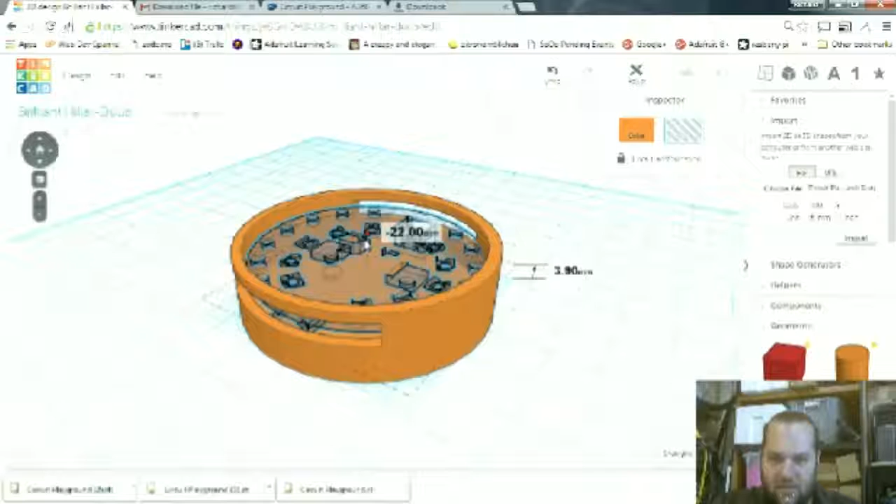Hopefully what will happen is if I take my circuit playground here and flip this over, this is going to go down and sit nice and flush with this side here, and then you pop the circuit playground down into the enclosure, and then you slide the battery in through this slot, and that holds everything in place. And then that way we don't have to attach like a pin or any of the magnet stuff for holding the button on to the circuit playground.

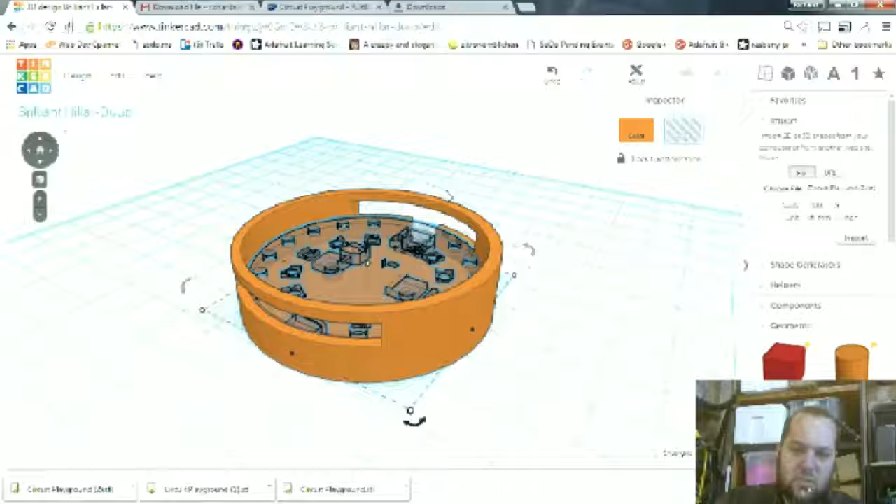At any time we can pull that circuit playground out and repurpose it for something else. We can instead put that magnet or pin on the battery itself, and that's what's going to hold it in. Ooh, of course, that brings up an interesting point. That's going to increase the size of the battery if we put that pin on there, so this would no longer work. So let's actually do one more thing here really quick. No, you know, I think I know of a way this is going to work anyways with that.

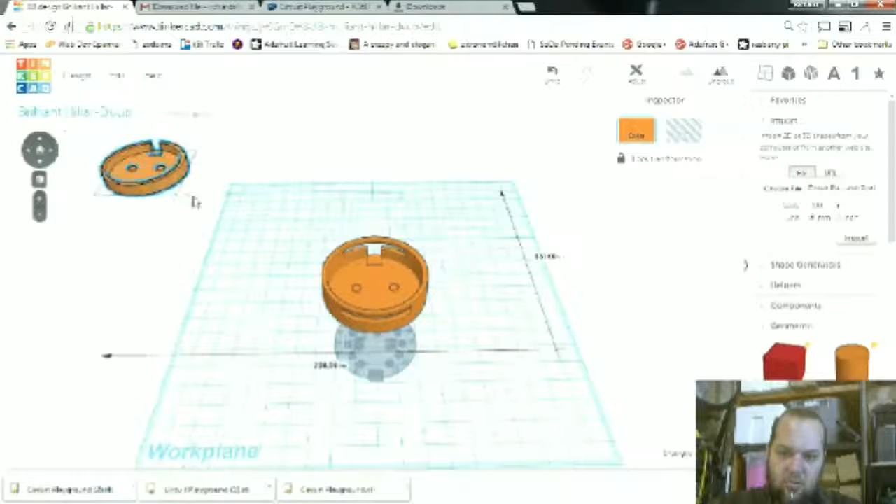So we're just going to go ahead and try and print this up. In order to do that, I want to bring that outside there. I'm going to turn this. I'm going to bring that over to the side. So this is ready to go. I'm going to select it. And then I'm going to download for 3D printing. I'm going to download only the selected objects as an STL.

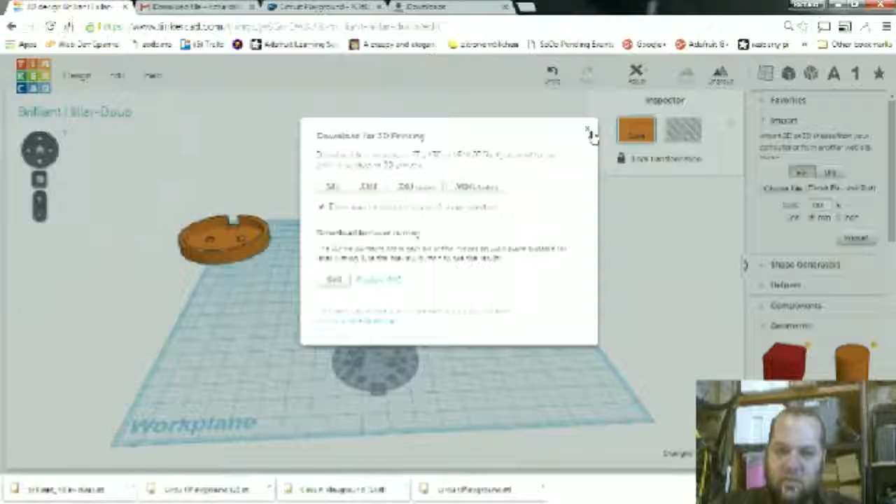And, oh, you know what, I'm actually going to name this first, because they do rename this stuff. So I'm going to name this. So, sir. What is this? Circuit.

All right, so that's it. We renamed the file. I'm gonna try and download that again so it's something that we can remember easily. Circuit playground.

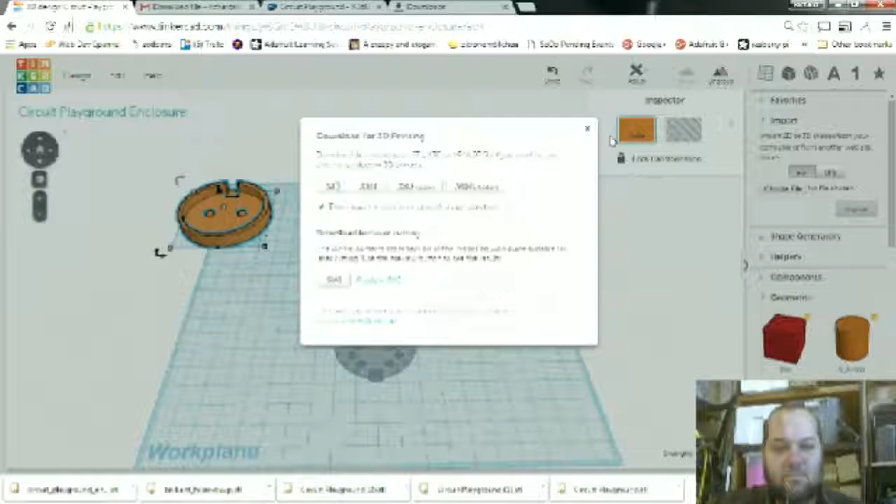And actually I'm gonna wait to see how this turns out with print, make some tweaks, and then upload this up to Thingiverse, and I'll post in the comments what the link to that is, as well as share that with everyone at Adafruit. So hopefully we can get people printing some of those enclosures.